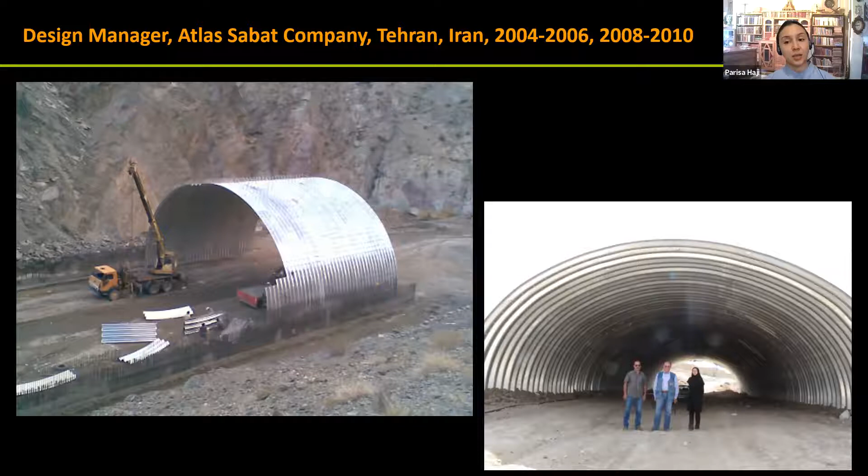I continued my master in this field and published the outcome of my academic and industry experience as a book and more than 10 journal and conference articles in this field. At that time, I organized short courses in this field at 2 of the most top-ranked universities in Iran.

I invited Dr. Bakht from Canada as a keynote speaker who was the technical chair for buried structures in CSA at that time. He was impressed with the work of our team and my contribution in this field, so he invited me to join as a technical member of buried structures subcommittee. And it is my honor to serve since 2011.

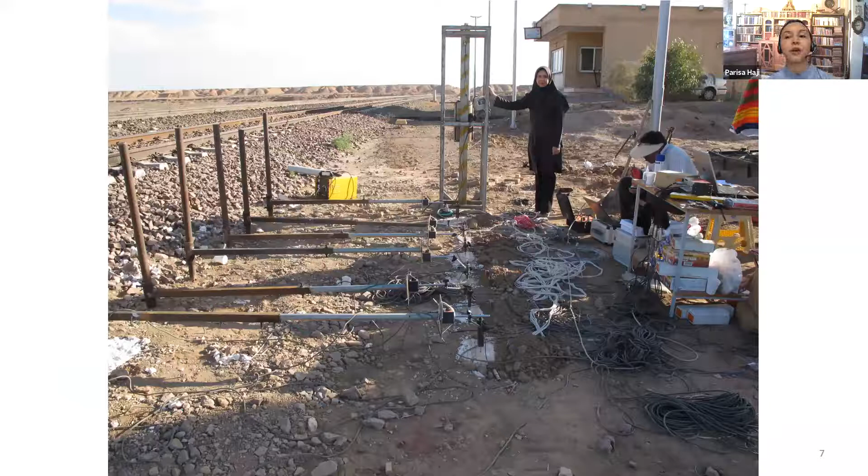So I contacted Dr. Hendry and he invited me to run analysis on their datasets. I joined U of A as a visiting PhD scholar for 8 months in 2014.

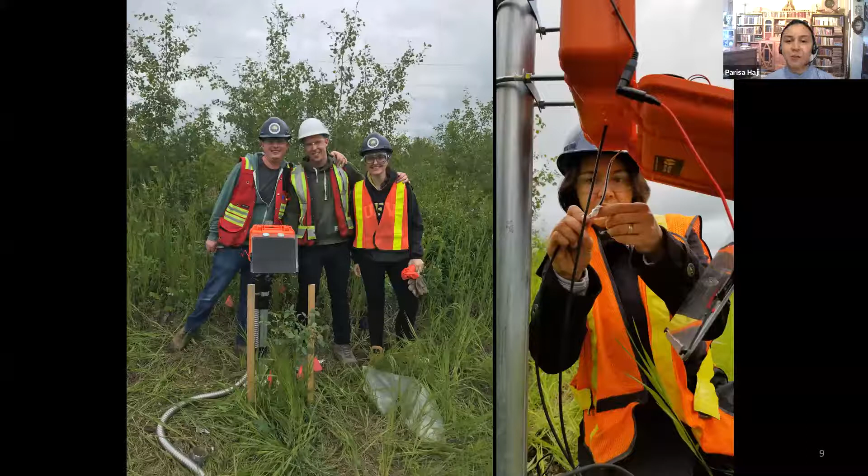After completing my PhD in Iran, I joined the amazing team of U of A as a postdoctoral fellow in 2018, and we ran lots of field monitorings, working as a team to run some of the field experiments. I'm proud to make all this journey, especially in the recent 5 years, with my son Daniel and my daughter Nika.

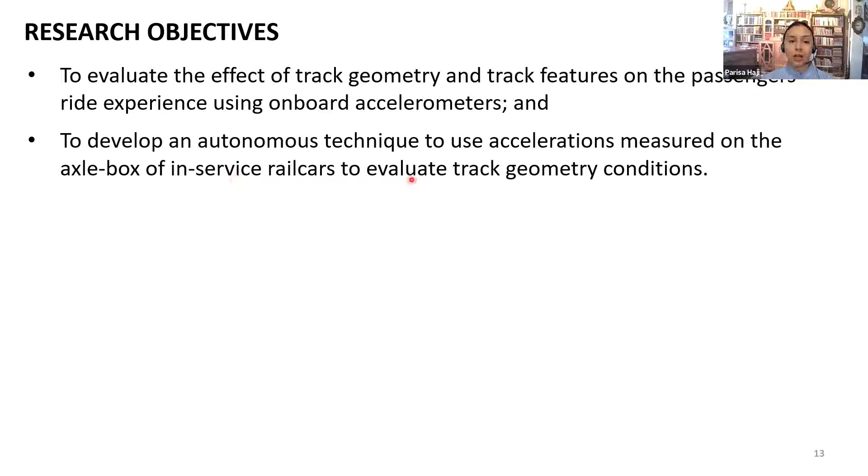Starting with our first presentation topic, the development of an autonomous technique to evaluate track condition from accelerations. The two objectives of this research are to evaluate the effect of track geometry and track features on the passenger's ride experience using onboard accelerometers, and to develop an autonomous technique to use accelerations measured on the axle box of in-service rail cars to evaluate track geometry conditions.

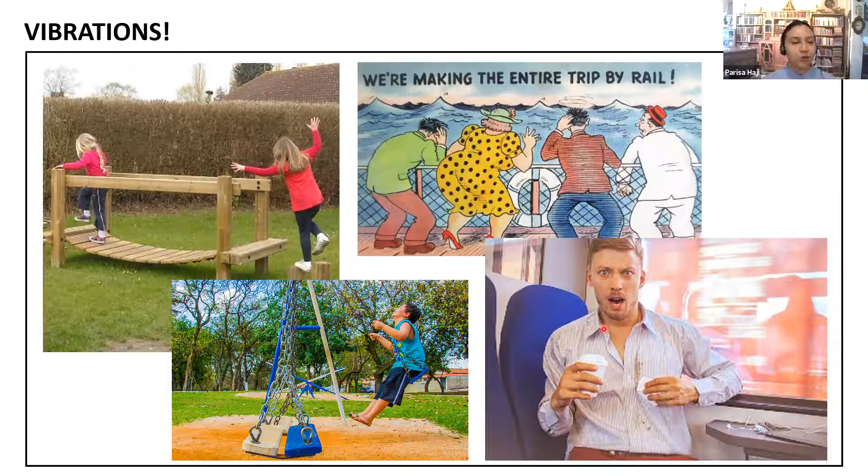All of this research was about how we analyzed the vibrations collected by sensors. Our everyday life is full of vibration. Our children enjoy the adventure of walking on a suspension bridge or riding on a swing. But when these vibrations are mixed and get random at different directions, they make us motion sick. This is something we definitely don't want to experience when riding a train, or we don't want a coffee spill on us. What we do is install sensors to record vibrations.

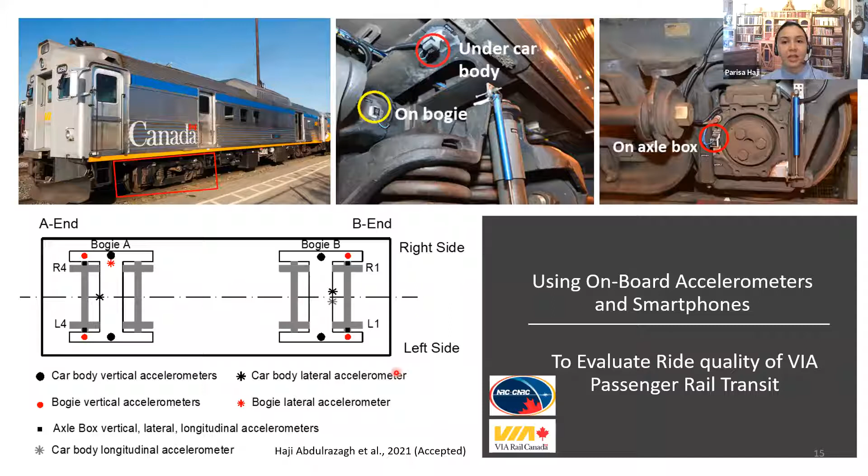A service passenger rail car was instrumented with GPS and accelerometers, each measuring the acceleration in a specific direction. The accelerometers were installed under the car body, on a bogie, which is a suspension system between car body and wheels, and on the axle box of the wheel.

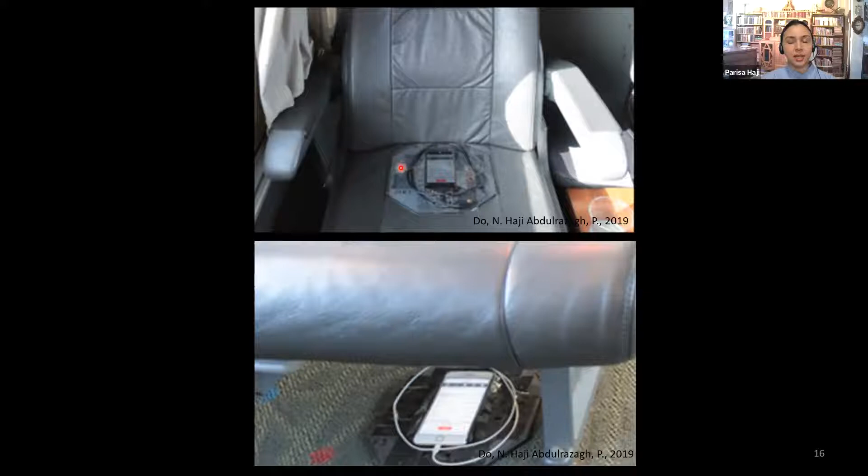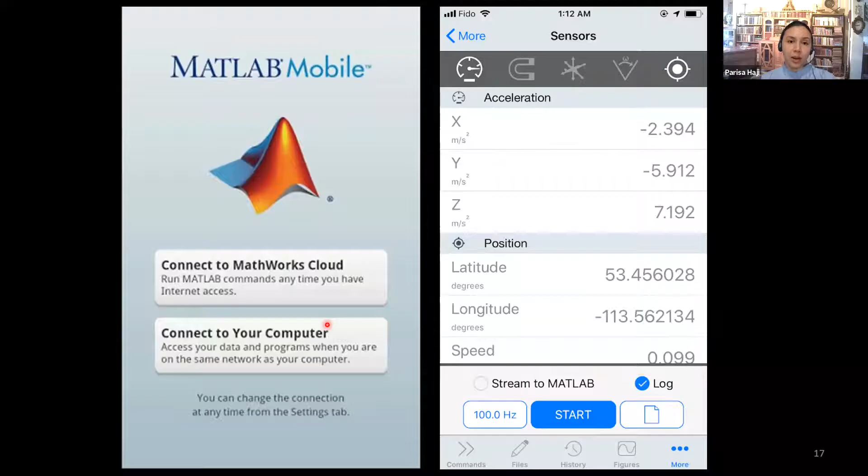In parallel to this research, I led a research team in collaboration with NRC to record accelerations using a free MATLAB mobile app installed on 8 smartphones, which were placed on the seat and on the floor of rail cars. The accelerations and coordinates were recorded in real time. The data were collected from both end cars and two middle cars in a 2-day run experiment.

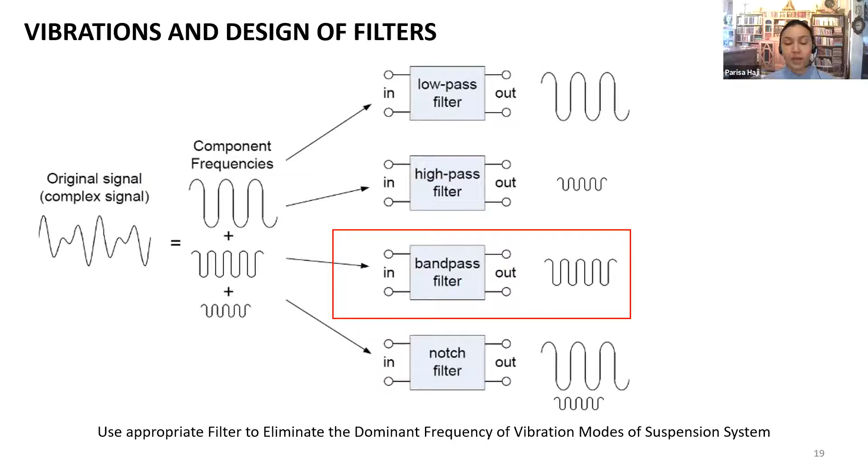Then I used different filters to extract vibrations that humans are more sensitive to, which we call ride experience. According to ISO 2631 standard, ride quality is the level of vibration felt by passengers.

In this research, I first calculated the combination of weighted accelerations in 3 directions, defined as AV or running RMS, which can be seen mainly at the location of track features such as grade crossings, bridges, and culverts. Fairly uncomfortable vibrations were measured at that section of track.

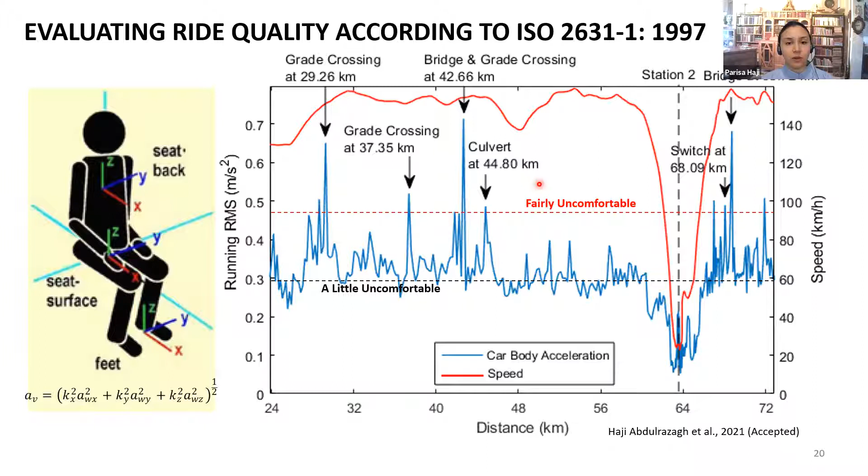The calculated ride quality was mapped along the study track for two purposes. First, to indicate these locations for the railway to consider upgrading these track assets, indicated with red spots if the operating speed will be increased in the future. Second, to investigate whether the location of these track assets coincide with organic deposits, shown in green, and if fairly uncomfortable vibrations are attributed to a stiffness transition in subgrade, or if it is attributed to a structural stiffness transition.

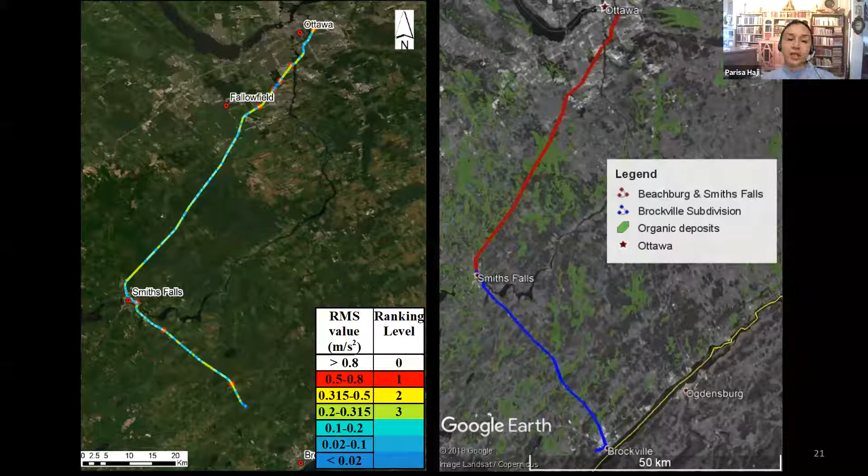Using the collected acceleration from axle box accelerometers, I developed an autonomous technique which makes it possible to evaluate track condition more frequently as a car is traversing the railway track.

Track geometry condition is an important measure to ensure the safe operation of rail lines. One measure related to this is track roughness. Track geometry condition is usually inspected by light or heavy track geometry inspection cars twice or three times annually, depending on the class of railway.

Due to increased axle loads and operational speeds in recent decades, track geometry is deteriorating at a faster rate. As such, there is a need to inspect the track more frequently. Thank God, this track is not on any Canadian Railway - I just brought it to show a visible roughness.

Track roughness means where the vertical and horizontal alignment of track deviate from their designed position. Track profile has different components: waviness, which is attributed to stiffness and long wave geometry variations, and short wave roughness, which is attributed to rail surface corrugations or squats.

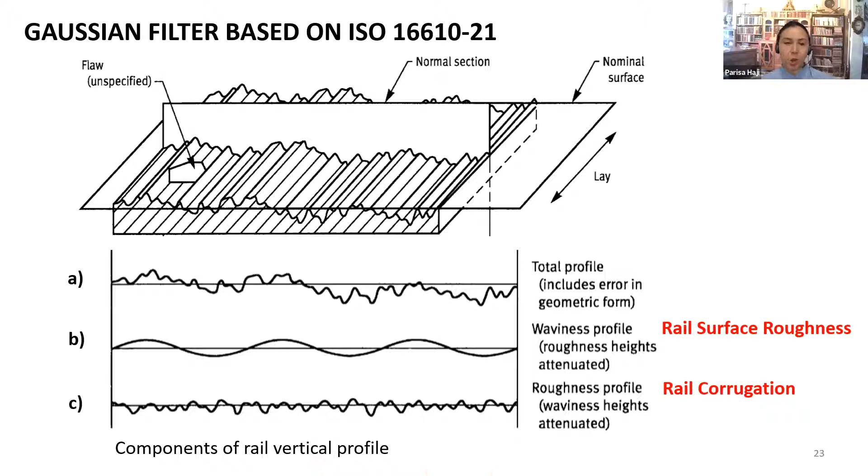The key to this research was to use an appropriate filter to cut off unwanted vibration components in this study, such as vibrations due to the suspension system, rail surface corrugations, and stiffness variations, and just focus on the changes of the geometry.

I filtered out the waviness attributed to those unwanted components based on the Gaussian filter recommended by ISO 16610-21. They have an open source Gaussian filter which I used in my calculation.

This figure shows that after filtering the measured track surface, both the vertical accelerations and the surface recorded by track geometry inspection cars have the same dominant wavelength, at 2 and 6 meters.

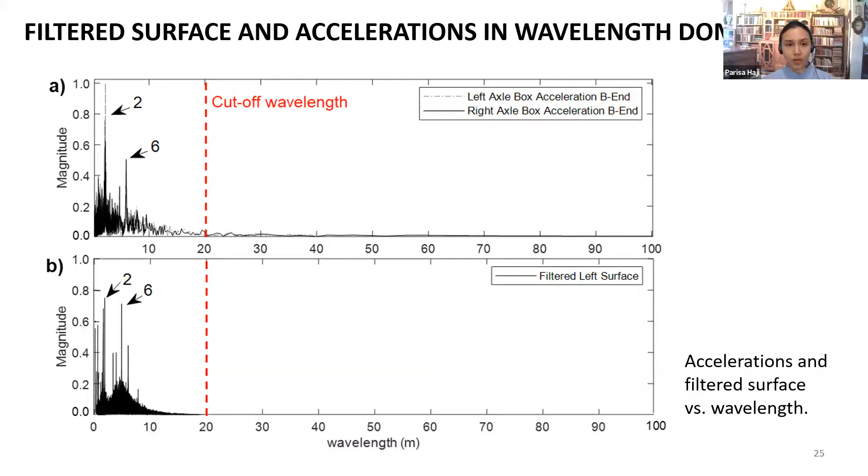After feeling confident that I'm dealing with the type of acceleration data set that has strong characteristics of surface geometry, I calculated the vertical track profile from double integration of axle box accelerations. First, I eliminated the nonlinear trend of acceleration signals by fitting a second order polynomial and subtracting it, using the best fit least square method via Cramer's rule. I repeated this twice to finally calculate the displacements.

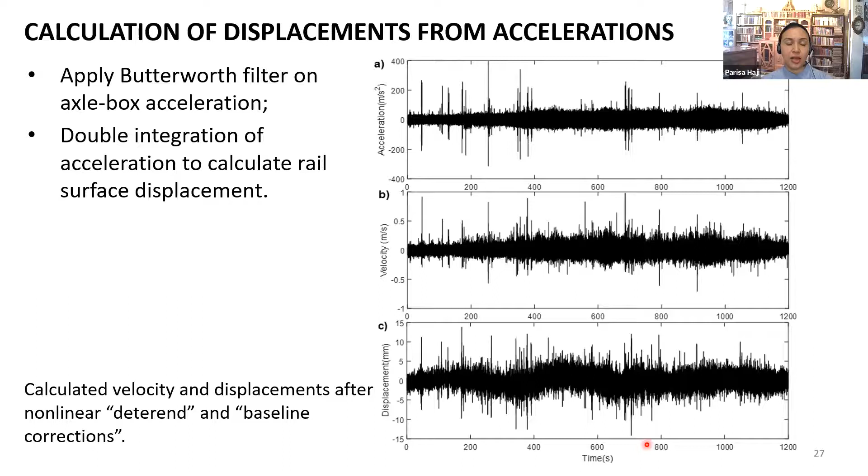I also corrected the displacement for baseline offsets. Figure C shows part of the result of velocity and displacement using single and double integration after applying nonlinear detrending and baseline corrections.

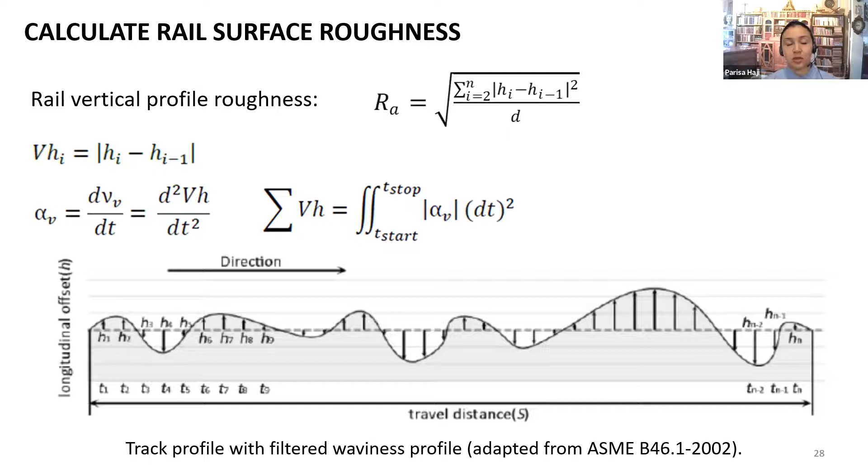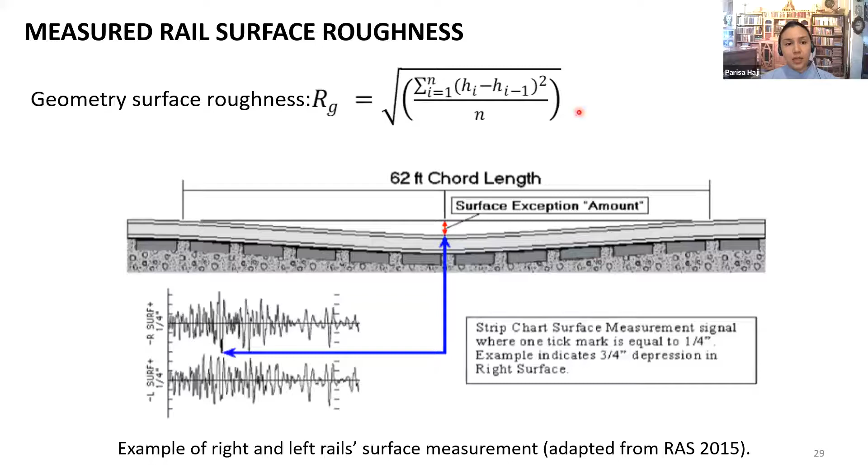Whereas the track geometry inspection car measures absolute variations of track profile from its designed level. Therefore, I had to calculate the relative surface roughness as a root mean square, in which I consider the relative displacements of the rail surface as an input to the formula.

In the third step, I compared the calculated vertical track profile and the roughness calculated from the measured rail surface by a geometry inspection car.

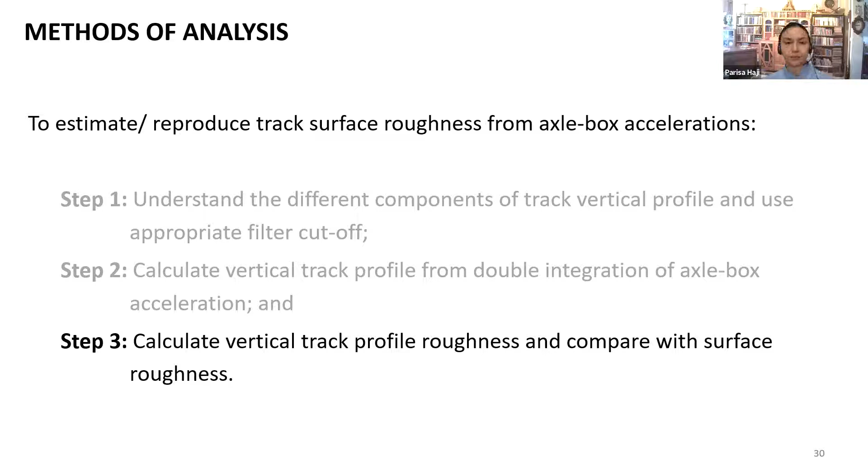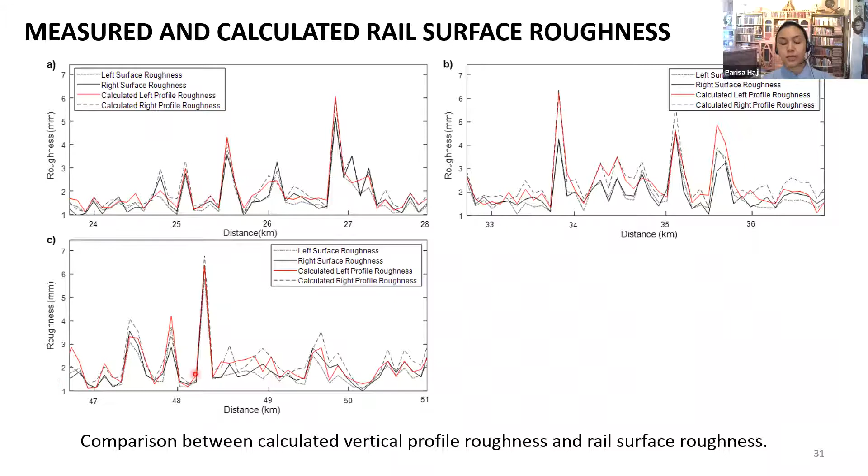Figures A to C show both surface and rail vertical profile roughness, calculated by computing the root mean square level of the inputs over every 100 meters, compared for three example sections shown in these figures. So the question is, why 100 meters?

From a statistical point of view, to have a sufficient statistical sample number representing the population and its behavior, variation, or changes, we need enough data. Considering that, 100 meters was the longest length to fulfill the minimum required samples for this study.

I also did a sensitivity study over different lengths, and 10 meters could also be the smallest length, because it should cover the wavelength of 6 meters. That's why I calculated for both 10 meter and 100 meter windows, the latter usually being used for maintenance-based calculations.

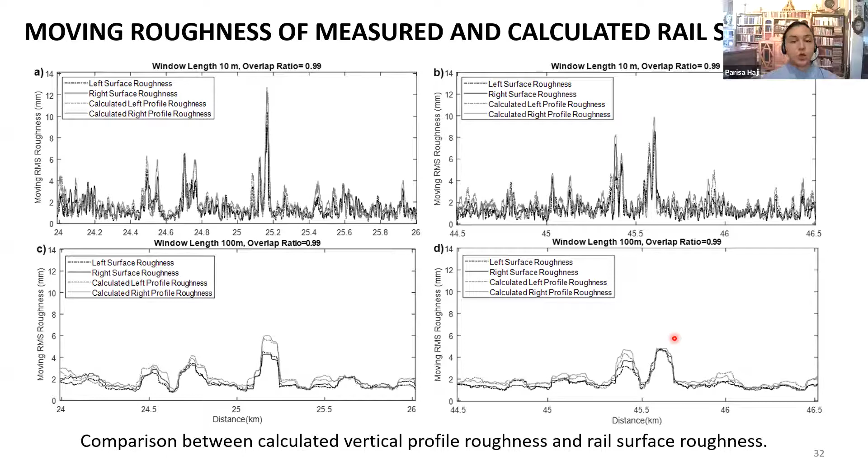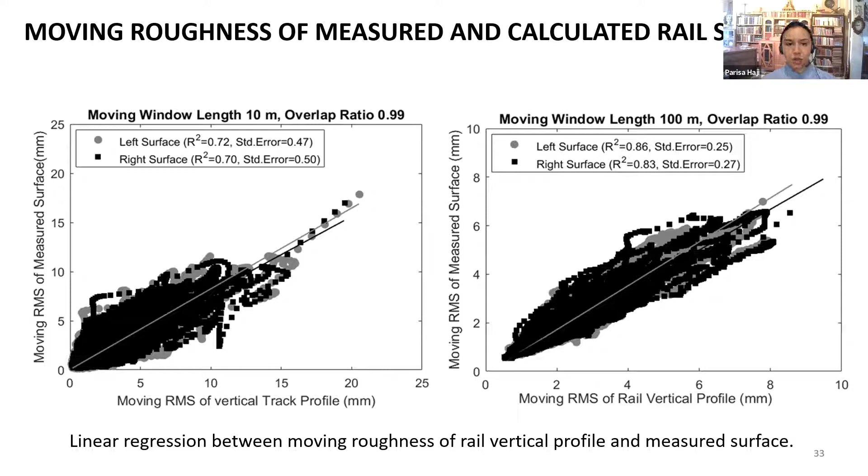The concluding remark is that the results of the developed technique are promising for calculating the roughness track geometry from axle box acceleration data, and track surface roughness.

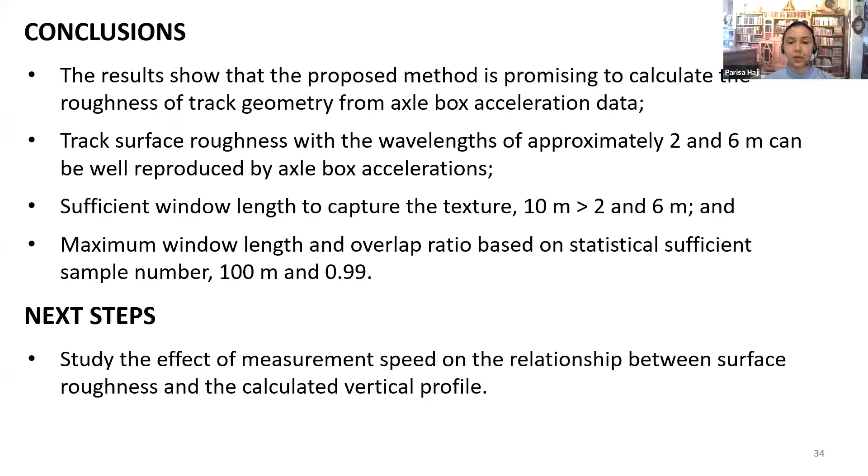In this study we have seen that 2 and 6 meters are the dominant wavelengths; 10 meters is the minimum sufficient length to capture the texture of variation of the rail surface profile, and the 100 meter window was the largest size needed to get an appropriate and enough sample for making calculations.

The outcome of this research can be used by the rail industry to identify track locations which might be more susceptible to degradation, and whose upgrades will significantly improve the ride quality of the track.

The result of this research also helps reduce the consequence of high dynamic impacts on bridges and switches, and therefore save maintenance costs for these two railway assets, as well as the cost of the suspension system. These two are related to the ride quality study.

For the roughness part of the study, the methodology developed in this research makes it possible to actively and non-intrusively assess the rail surface roughness in an inexpensive way, on a daily basis, directly from the data measured by axle box accelerometers mounted on service rail cars.

The developed methodology can be used as a complementary technique to light and heavy track geometry inspections, to proactively identify rough surface conditions prior to the formation of any major rail surface defects.

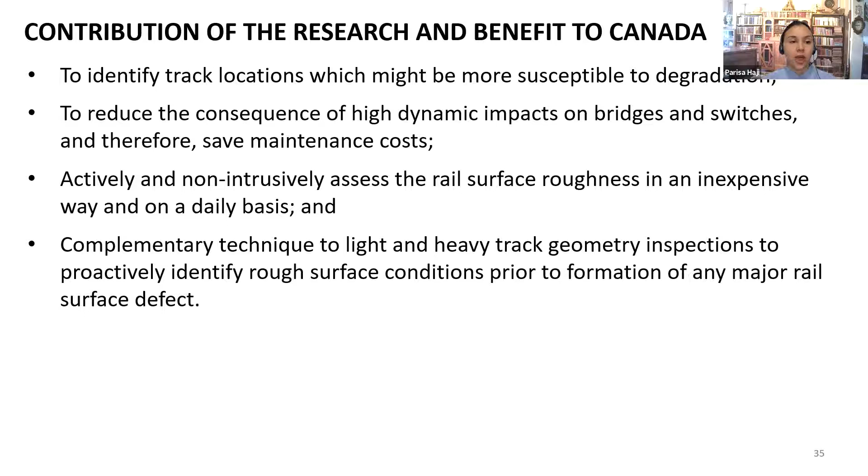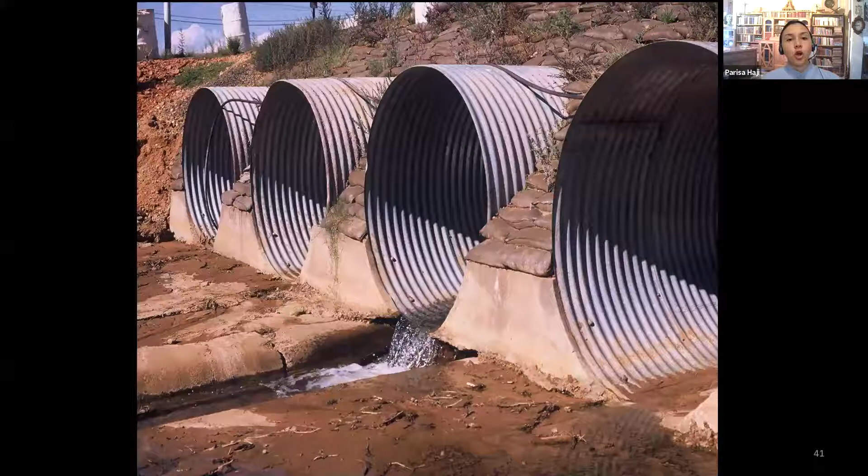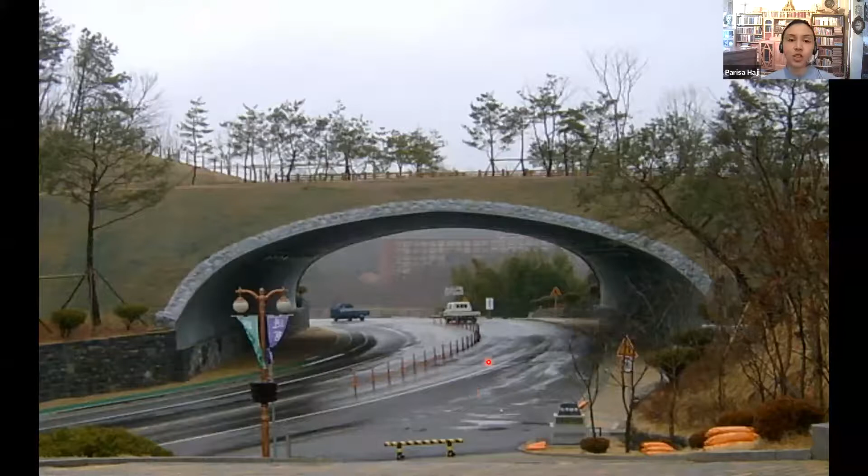For sure, you have seen the conduits for drainage and sewage in the city and out of the city, road bridges over river streams, and overpasses for wildlife in Banff National Park. CHBDC Section 7 covers the regulation for the design and construction of all these soil steel structures with a variety of span lengths and structural shapes.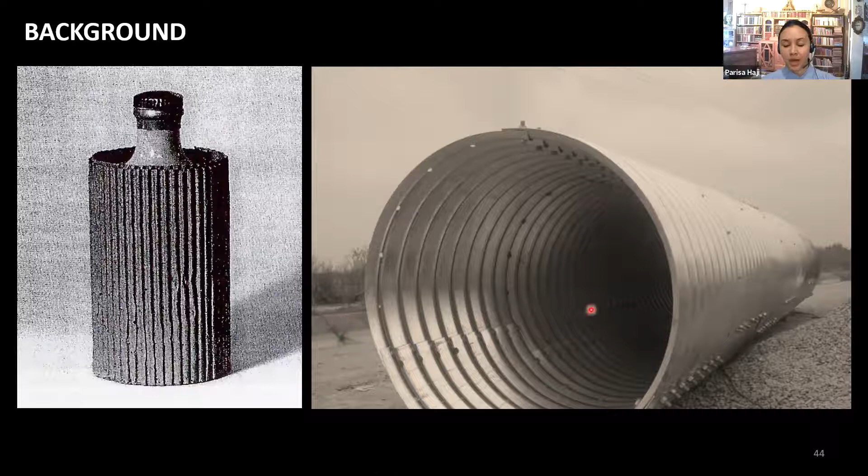The history of this structure goes back to 1886, when an engineer named Watson took the idea of corrugated plates from the corrugated paper wraps of bottles and invented pipes made of metal corrugated plates. The advantage of corrugated plate is that the area and moment of inertia of the section is doubled over the same length, which allows for bearing significantly larger stress.

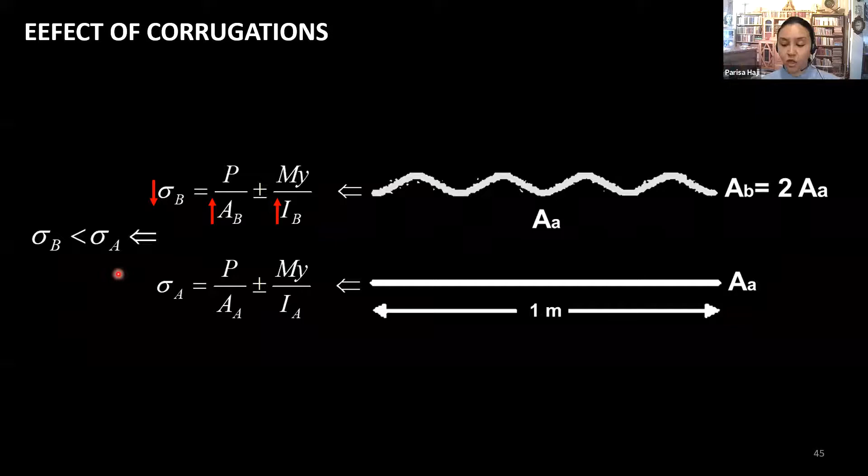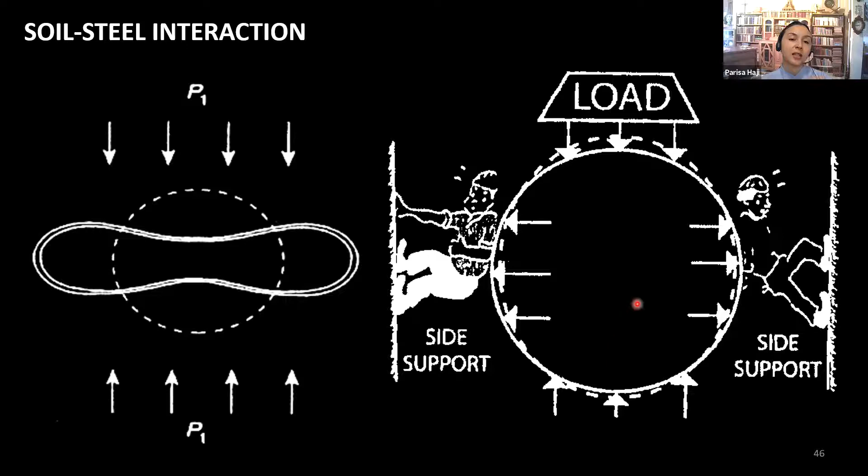For example, if you consider a sheet of paper, it's flat, you can see the deformation. But if it's corrugated, you can see there is less deformation and it can carry significantly larger loads. However, the conduit might undergo excessive compression, and side pressure can help to increase the compression strength of the conduit. These side pressures are attained by layered compaction of soil around the corrugated steel plate structure.

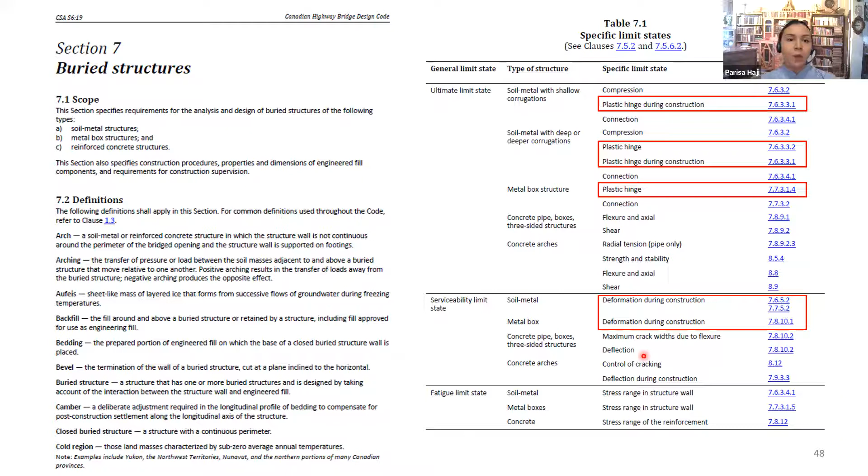The Canadian Highway Bridge Design Code has defined specifications to prevent plastic hinge and deformation under service load and under construction load. Part of these specifications are related to geotechnical considerations to prevent any soil capacity and tension failure by defining minimum height of soil cover, material requirements, and adequate compaction and right practice of placement of materials, which in turn prevents local buckling and connection failures.

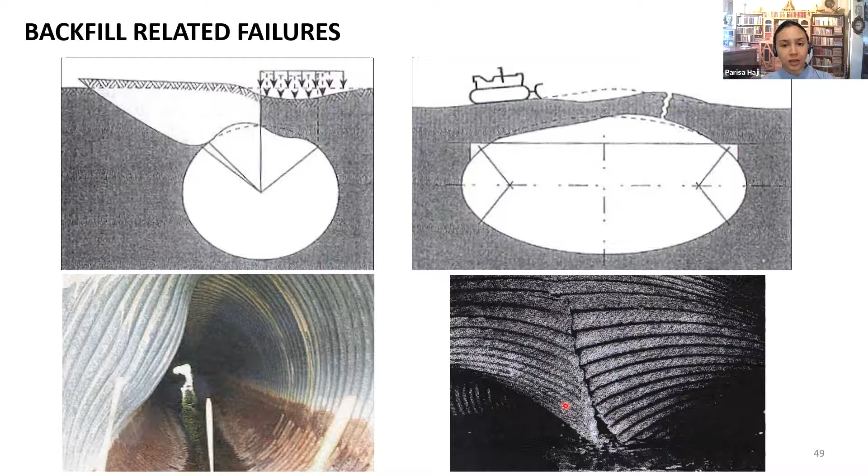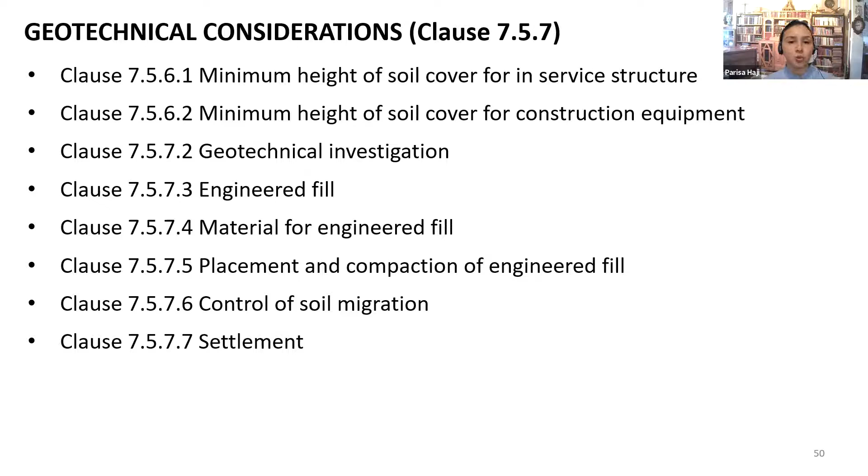The related clauses are listed in this slide that you might be interested to check. Today, I don't intend to go through the details or formulas. I only touch base on some of the concepts of some of the listed clauses. The first clause is the minimum height of soil cover for service structures. The minimum height of cover means the height of soil cover between the road surface and the peak of the corrugated plate.

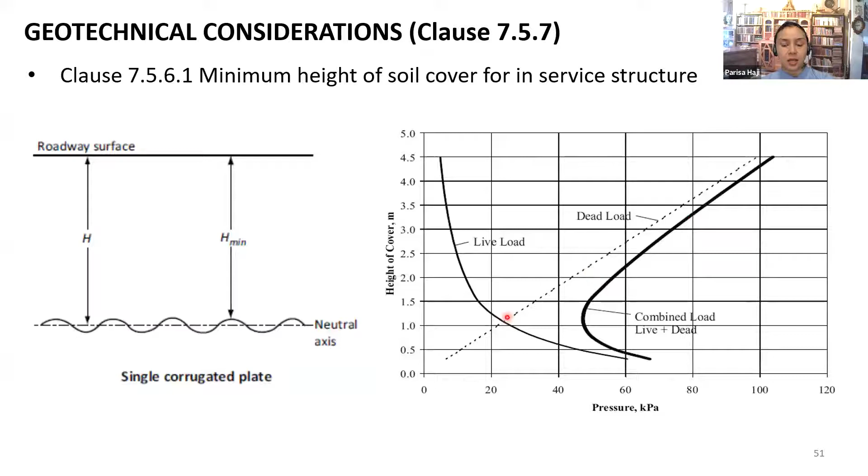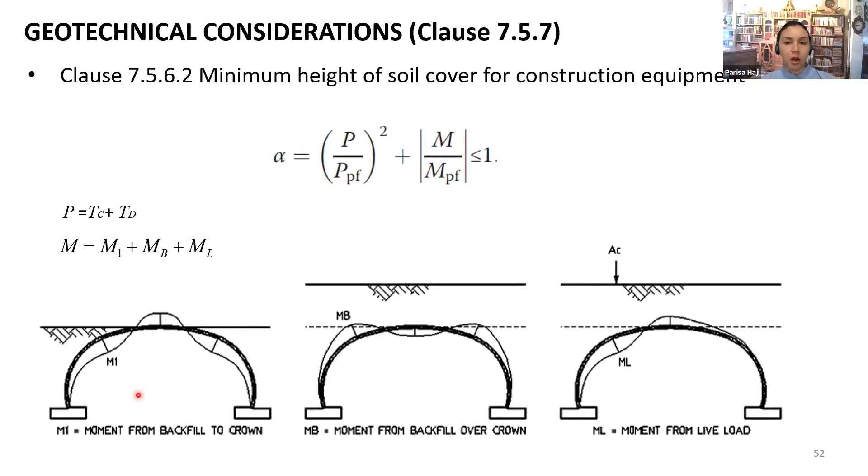Usually, there is an optimum height of soil cover, which minimizes the pressure from live load while maintaining the least dead load due to weight of soil. The minimum height of soil cover helps to avoid buckling of the conduit wall by controlling the combination of bending moment and axial thrust both during construction and under service loads. At least 30 centimeters of soil cover should be dumped over the crown of the structure to allow for travel of light construction equipment.

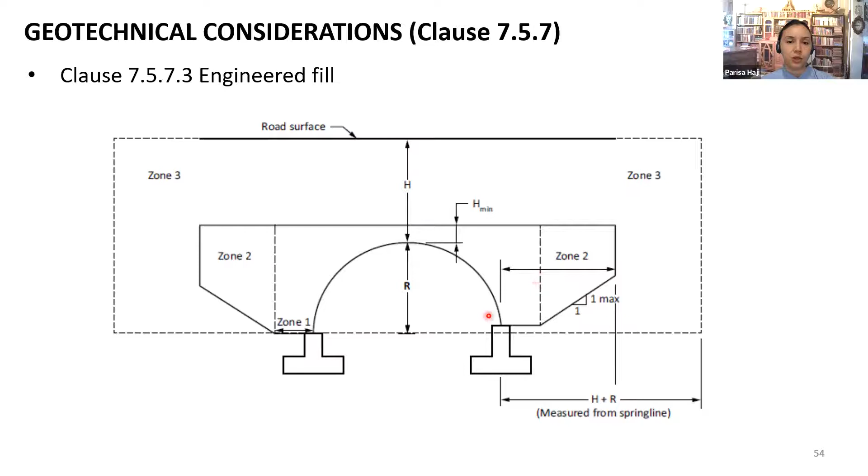Another important aspect of the geotechnical considerations is the extent of engineered backfill on both sides of the structure. Each zone has minimum requirements for soil materials. Non-frost susceptible soil materials should be compacted at least 1 meter from both sides of the structure.

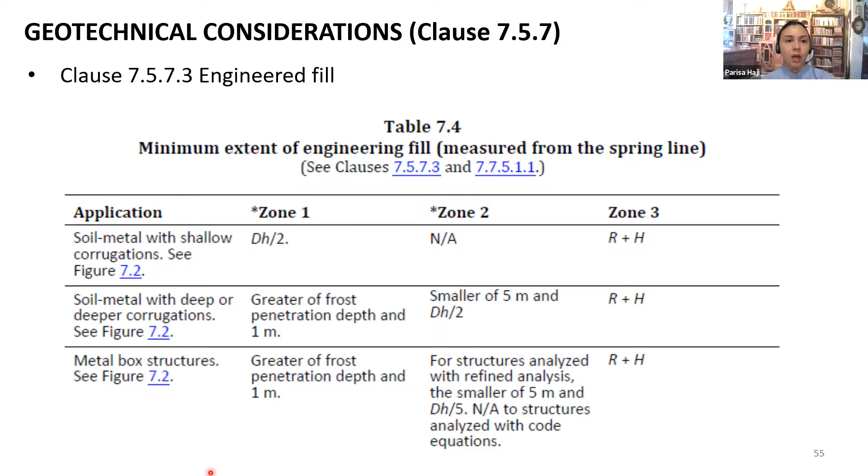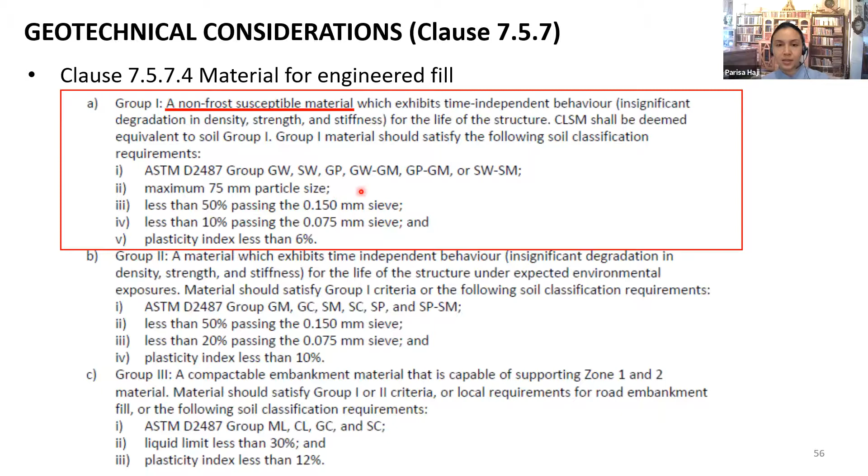Non-frost susceptible soils immediately beside the metal walls are of the type of well-graded gravel or sands with a maximum 75 millimeter particle size and less than 50% passing the 0.15 millimeter sieve and less than 10% passing the 0.075 millimeter sieve with plasticity index less than 6%. Following these specifications can significantly reduce road surface and railway track issues during winter due to forming of ice lenses in poor unengineered soil.

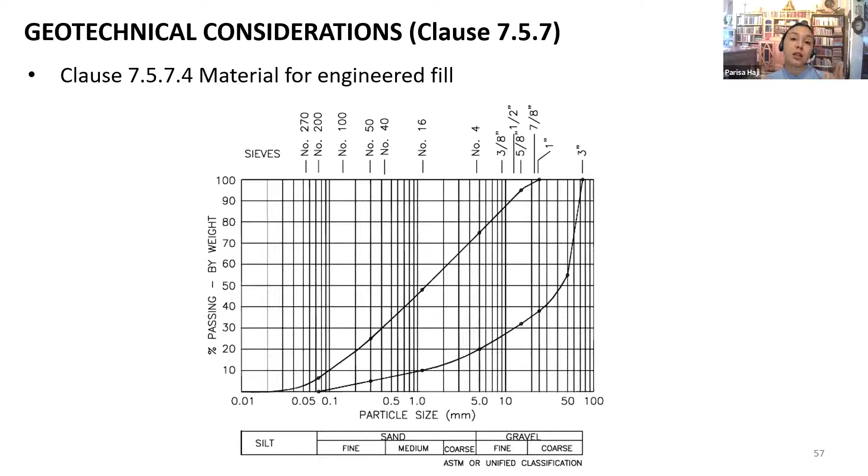During the placement and compaction of soil materials on both sides of the structure, a minimum space of 1 meter should be maintained between the steel walls and heavy construction equipment, which we consider as greater than 10 tons.

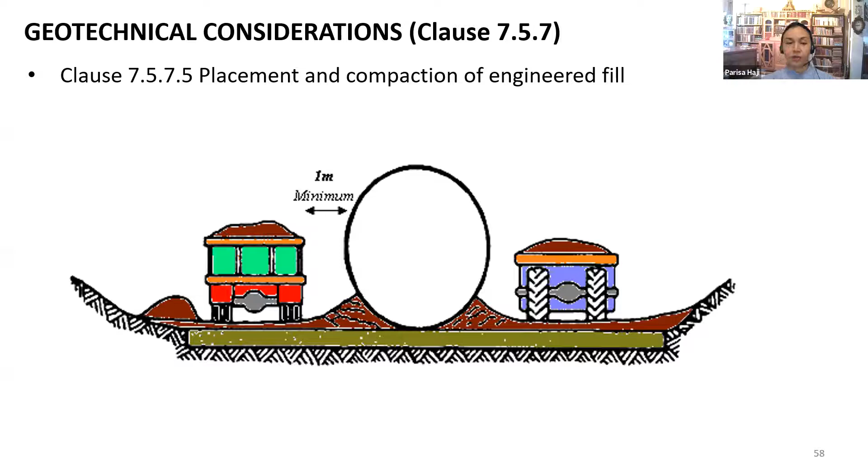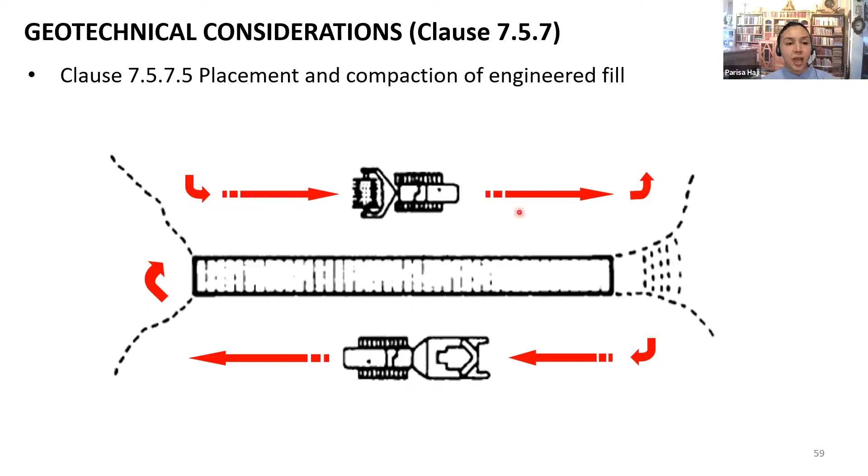Also, the construction equipment should move parallel along the structure and avoid any perpendicular movements. The placement of soil material should be even on both sides of the structure with a maximum difference of one layer. The maximum loose thickness of each layer of material is 25 centimeters. And the engineered backfill immediately beside the structure in zone 1 should be compacted to 85 to 100% standard Proctor density to prevent the buckling of the crown during the construction.

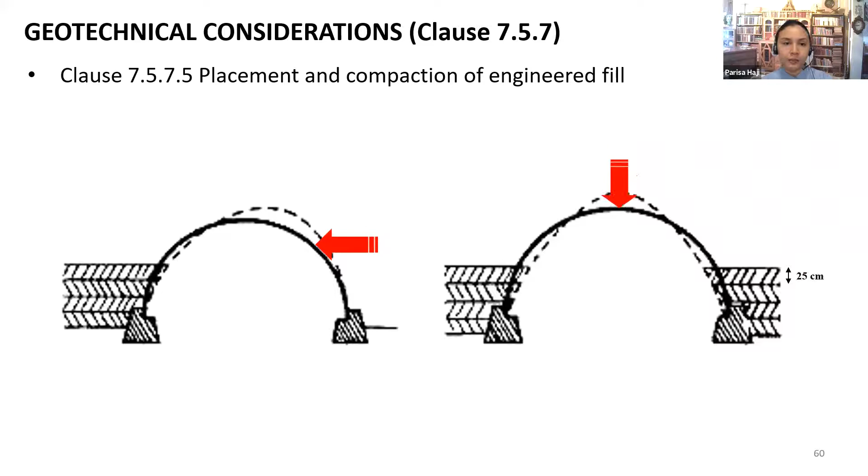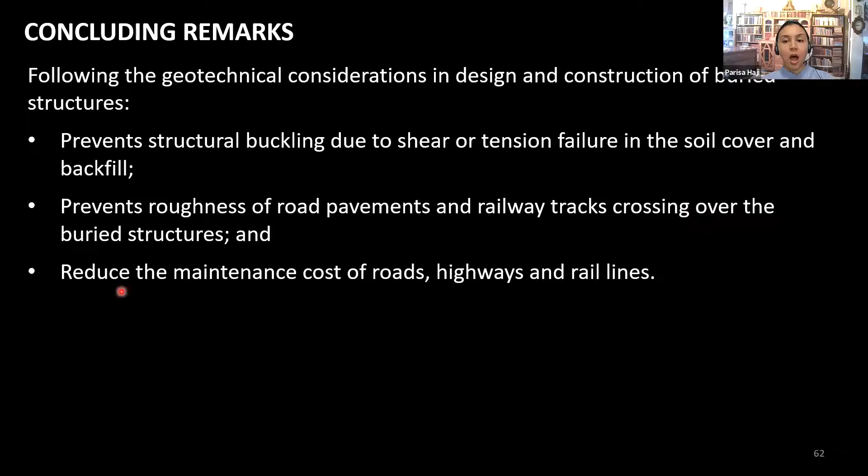The concluding remark of this presentation is that following the geotechnical considerations in design and construction of buried structures prevents structural buckling due to shear or tension failure in the soil cover and backfill, prevents a rough surface of road pavements and railway tracks crossing over the buried structures, as we can see in many places, and reduces the maintenance cost of roads, highways, and rail lines. And here are some of the major references.